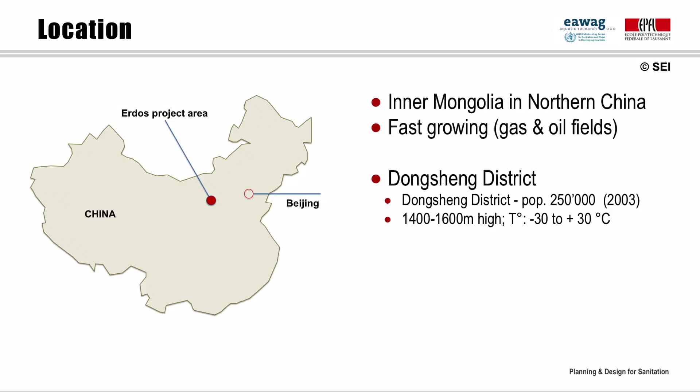This slide shows the location of the Erdos project area in Inner Mongolia and northern China. It is one of the fast-growing areas of inland China thanks to exploration of gas and oil fields. Some of the features of Dongsheng district: the population was about 250,000 back in 2003. The area is between 1,400 and 1,600 meters high, with a wide range of temperatures from -30 degrees in winter to +30 degrees in summer. However, by 2007, already 75% of the urban area was sewered, in line with many Chinese cities. It should be noted that Erdos lies in a water-stressed region with low rainfall, and that historically, the use of waste as a fertilizer was quite common. The project developers decided that this was an enabling base for testing the newly proclaimed Chinese recycling economy.

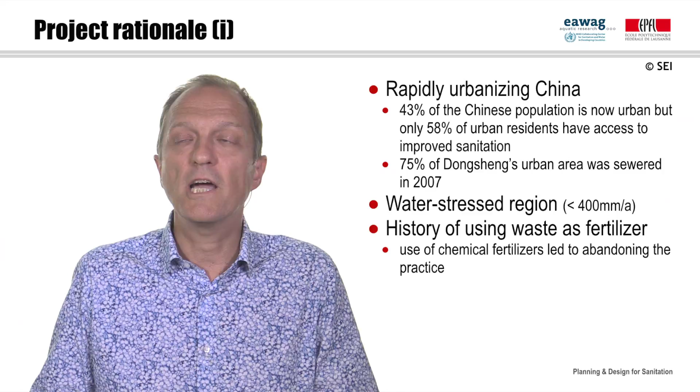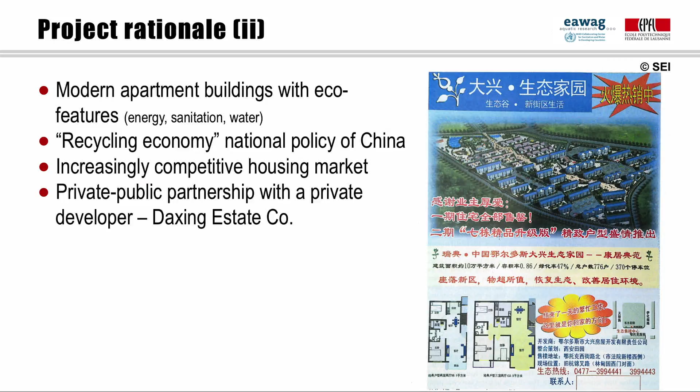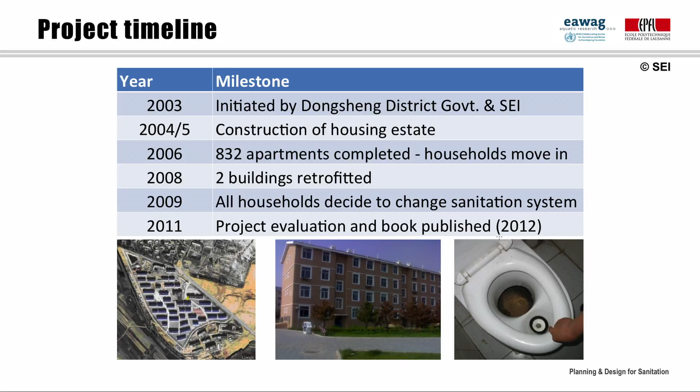This slide shows the project timeline. The project was initiated in 2003 by the Dongsheng district government and the Stockholm Environment Institute. In 2004 and 2005, the housing estate was constructed, one of the buildings shown in the middle on the bottom. In 2006, 832 apartments were completed and the households started moving in. The photo on the right shows the source separating dry toilet used for all apartment buildings. In 2008, 2 of the buildings were retrofitted with improved dry toilets. And in 2009, due to high dissatisfaction with the sanitation system, all households decided to change the entire sanitation system and to revert back to conventional flush toilet systems. In 2011, SEI conducted a project evaluation and published a book about its findings in 2012.

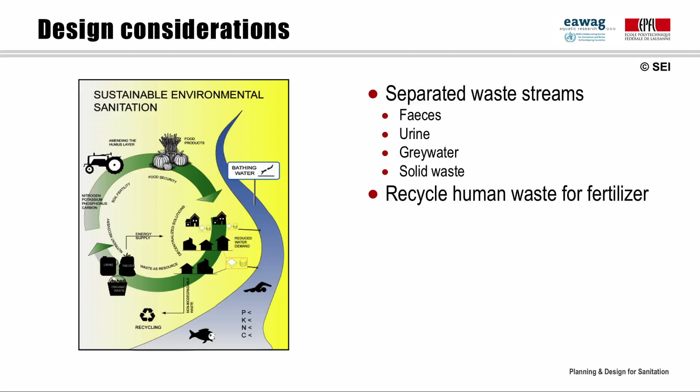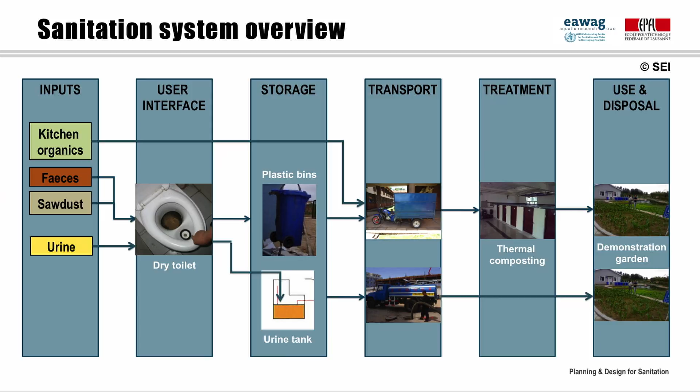Some of the design considerations of the Erdos project: it featured a sustainable environmental sanitation system with closed-loop separated waste streams. This included separation of feces, urine, grey water, and solid waste, and the recycling use of human waste for fertilizer. This slide shows an overview of the sanitation system. Firstly, feces and urine are separated in the dry toilet, shown here in the user interface. The feces and sawdust were collected in a cellar in plastic bins, transported to a thermal composting plant, and finally, after treatment, brought to a demonstration garden. The urine was collected in an underground urine tank, pumped out at regular intervals, and also brought to the demonstration garden.

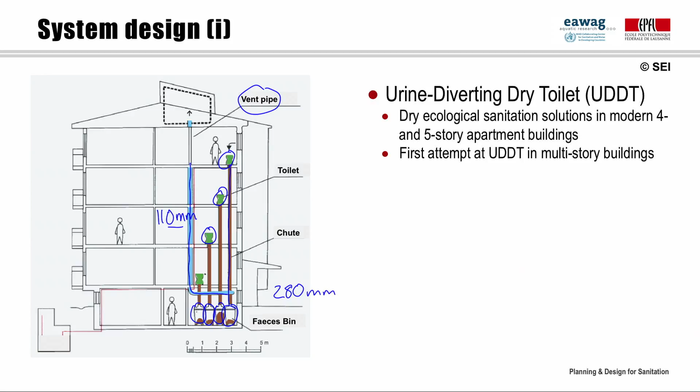This slide shows the system design in a section of one of the apartment buildings. It shows the different urine diverting dry toilets, shown here in green, which are connected to dry collection systems or chutes, which were used as pipes with 280 millimeter dimensions. Additionally, there were vent pipes connected to each toilet that ventilated the toilet systems. These pipes were 110 millimeters thick. And finally, at the bottom of the system in the cellar, the feces bins that were connected to each of the toilets. The system as it is shown here is the first attempt at introducing urine diverting dry toilets in multi-story apartment buildings.

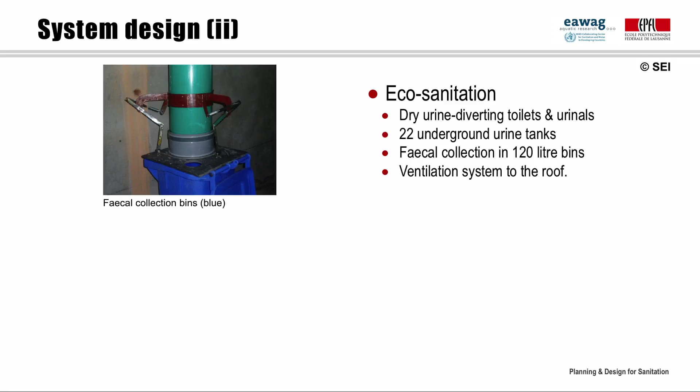Let's look at the system design. The picture on the left shows the dry chutes that are connected to the collection bins in blue. Additionally, there were 22 underground urine tanks that collected the urine from the different toilets. And there were also ventilation systems connected to each toilet that led to the roof. The image on the bottom left shows the on-site treatment station, thermal composting of feces that could treat 1.5 tons of feces per day. Additionally, there was a grey water treatment system that consisted of anaerobic tanks and sedimentation tanks that could treat up to 250 cubic meters per day. The compost and urine could both be used in the adjacent demonstration garden next to the housing estate.

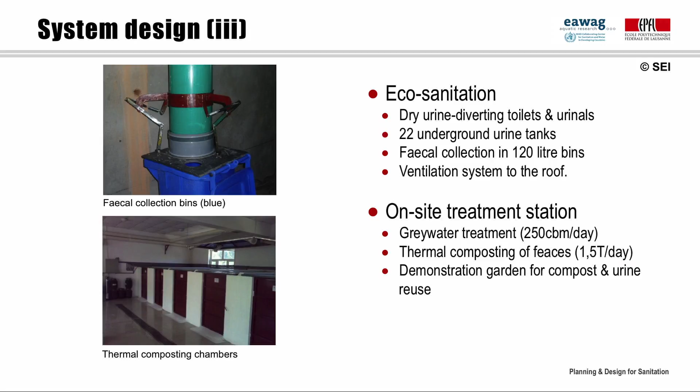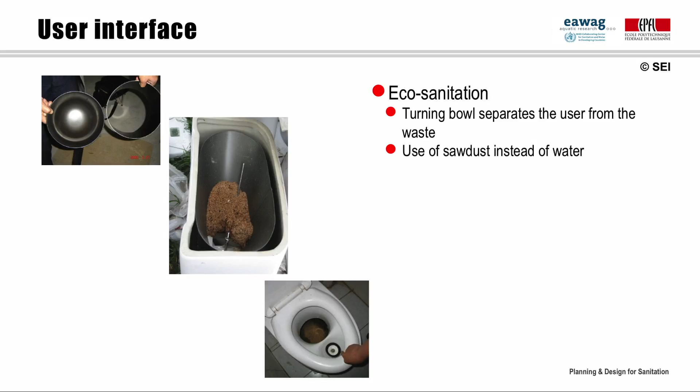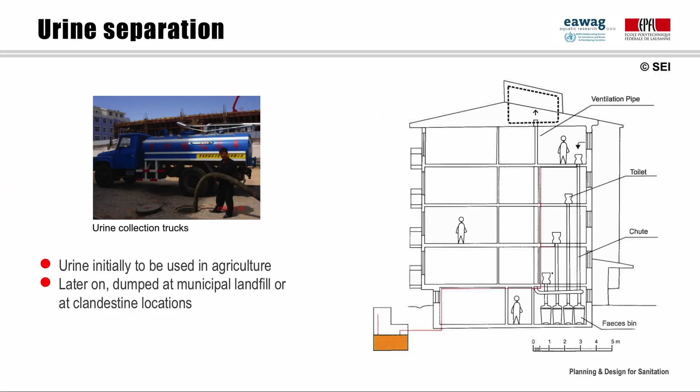This slide shows the user interface, the heart piece of the eco-sanitation system. It featured an innovative dry separating toilet with the Teflon-coated turning bowl that separated the users from the waste. It also featured sawdust instead of water. The sawdust was added to minimize the odor problems, but also to speed up the drying process of the feces. The separated urine was collected in an underground tank, shown here in this section, and was initially used in agriculture. Later on in the project, it was also dumped at municipal landfill sites or even at clandestine locations by the emptying company.

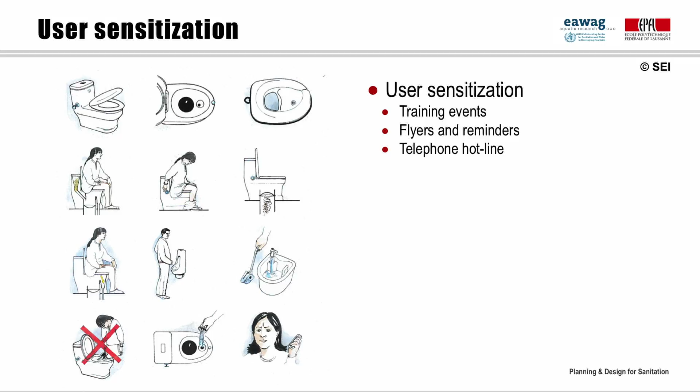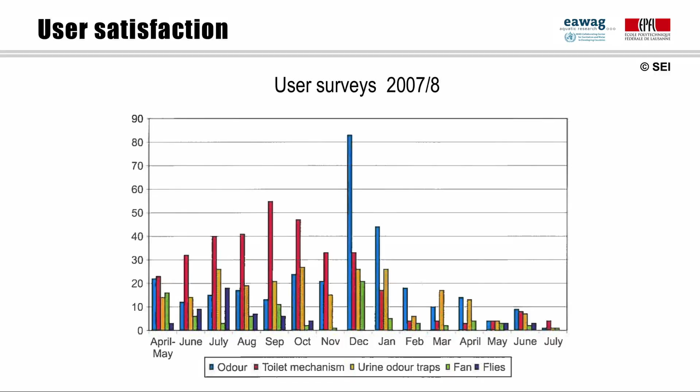In the next module, we'll be looking at some of the reasons for the system failure of the Erdos project and why the dissatisfaction with the toilets and the sanitation system eventually led to the dismantling of the existing system and replacement with conventional flush toilets.